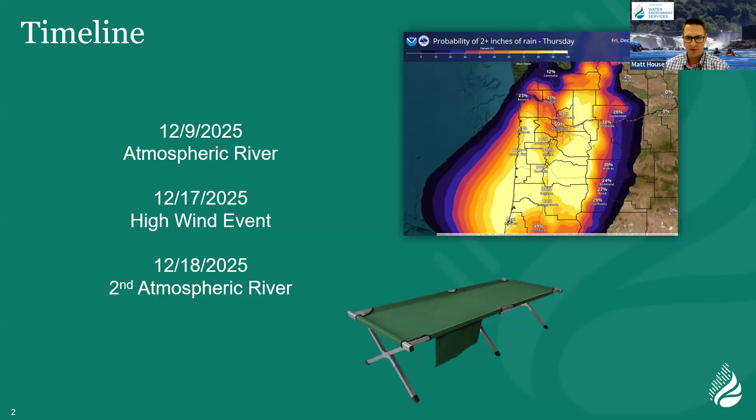Many of our staff ended up working around the clock. We had folks staying at our treatment facilities, basically working all night, ensuring that we were operating and maintaining all of our facilities and responding to issues that came up. Next slide, please.

So this is a graphic that we put together just to show the treatment plant responses, and this is over the course of both events. But for the first part of the story, we're really focused on the event on the 9th. These are peak hourly averages, and you might see some peak instantaneous flows that we observed in slides that are coming later.

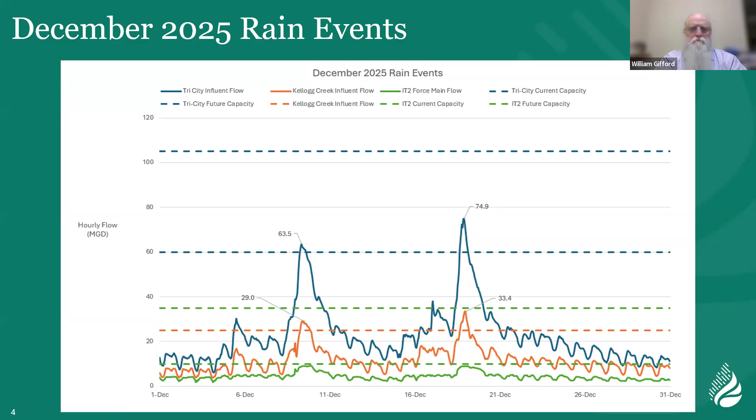Thank you. Next slide, please. So with over 2.5 inches of rain at Tri-City, and we saw over 3 inches in the basin, out in the basin, this first event we did not have the new 90-inch outfall online yet.

Through construction, there's some changes with baffle elevations. Basically, our existing outfall is a little bit higher to accommodate the final design, and we navigated some backed up flows into the plant. You can see here at the peak of the event on the left is what our secondary clarifiers would typically look like, and on the right is what they look like at the peak of the storm. You can't see the weirs; they're completely submerged. Many of you have probably been on tours here before. The left is what we want to see. Right is not what we want to see.

Moral of the story is that we did temporarily exceed a couple of our daily permit limits at Tri-City, but our process recovered very quickly as soon as the flow subsided.

Are there penalties assigned to those if we go over the limits? To be determined, and sometimes we get some grace during these really high flow events. I would say we typically get grace during these high flow events because the 1-in-5-year storm event is kind of not just the engineering, but the regulatory threshold for whether folks enforce or not. That's why it's called an emergency, right? Exactly. And I should have said at the top too, this is totally meant to be a conversation, just sharing what our experience was, and I think it's a pretty good story.

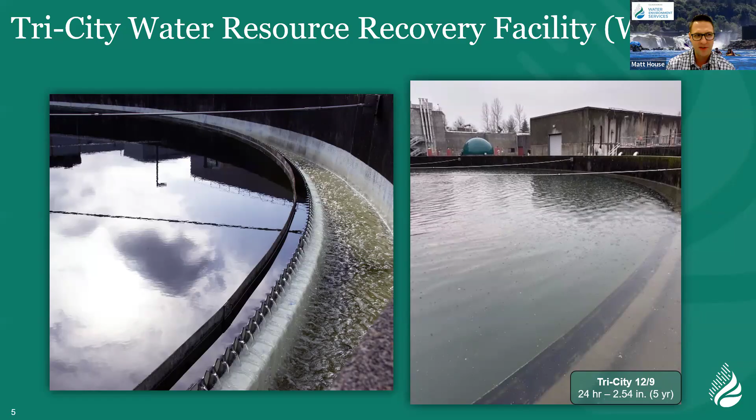So what you can see here is our aeration basin, chlorine contact basin, a picture of our influent pump station, and SCADA at the Kellogg Water Resource Recovery Facility. During this event, we really optimized all of our tankage, so there are some higher than normal water elevations in that aeration basin. For the SCADA photo on the right, red indicates pumps running.

As I mentioned a minute ago, peak hourly average flows were right about 29 million gallons during this event, and our cap there is 25 million gallons. The intertie diversion pump station, which can pull flows away from Kellogg and ship them over to Tri-City, was completely maxed out at 10 million gallons during this time period.

The great news is our intertie project, currently under construction - maybe some of you have navigated around that while we're building it - is going to reduce the peak flow at Kellogg to within capacity during these types of events. Our ability to divert is going to go from 10 million gallons a day up to 35 million gallons a day. That project is going to be completed this year.

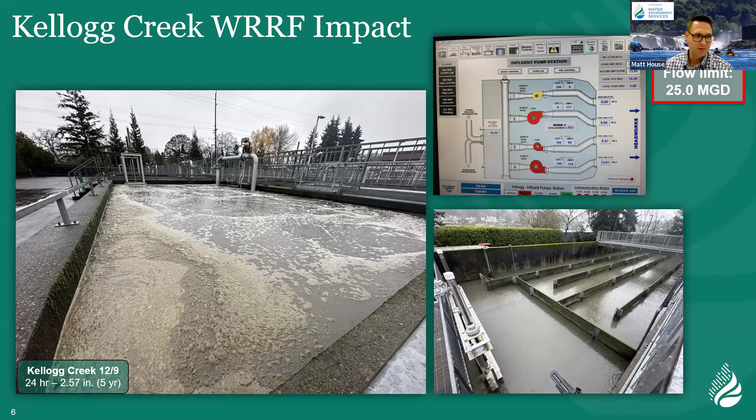So with that first event, we manage over 360 miles of pipes and over 8,000 manholes, and we did experience one sanitary sewer overflow during that event throughout our entire collection system.

This is from the seawall that serves Oregon City, and we've got a solution for this as well. We have an upcoming Willamette Pump Station force main project that will alleviate a hydraulic bottleneck we see during really high flow events coming across the arch bridge. That connection from West Linn will move further downstream across the I-205 bridge. That project is under design right now. We obviously don't want to see any overflows in our collection system, but in this case, given the relative impact to water quality with the very high river flows, and the fact that this site was inaccessible to the public, while not what we want to see, I think we've got a good plan moving forward.

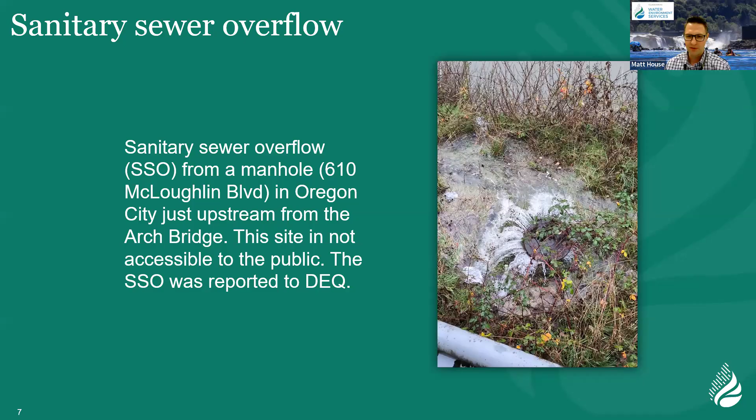This one will come up again with the second event. Moving up to—oh sorry, Mary McGriff, did you have a question or comment?

Maybe not. All right, moving up to the mountain service area. Fortunately, through this whole event, we didn't have any pump station sanitary sewer overflows. We manage 23 of those throughout our service area.

But with the heavy rains—I mentioned almost 4 inches in 24 hours—to avoid an overflow at our Timberline Rim pump station, right next to the Sandy River, we had teams go into 24/7 operations with tanker hauling, pumping directly from the pump station wet well where the wastewater is collected into tanker trucks. We were trucking them up Highway 26 to the treatment facility, unloading them, and making loops for 3 days to prevent an overflow there.

You'll hear a lot more about this station a little later with the second atmospheric river.

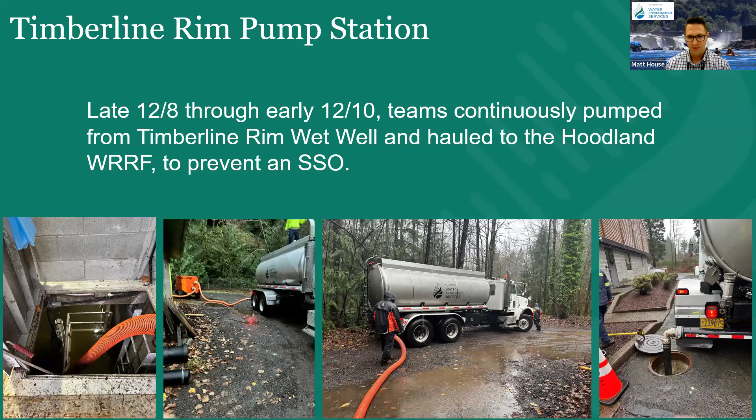So just to keep things interesting, the following week after we got through all that and got our crews home and rested...

I don't know if the wind woke any of you up from the west on that Tuesday night. I know I don't sleep well when we get a lot of events because our team starts getting alarms and they're waking up from bed and coming in to help us out with whatever the issue of the current situation is.

So I stole a little bit of info here from Mark Nelsen, my favorite meteorologist. I mentioned I was a bit of a weather nerd. He noted that this was one of the top 3 west wind events that he had seen in his 30-year career. There's 170,000 PGE customers without power.

We lost power to all of our 6 mountain pump stations around the Brightwood Welches area. The treatment plant lost power too. So that puts us into 24/7 operations, managing our on-site generators and ensuring that all those facilities are operating well and effectively. We had a couple trees go down over our chlorine contact basin at our treatment facility up there.

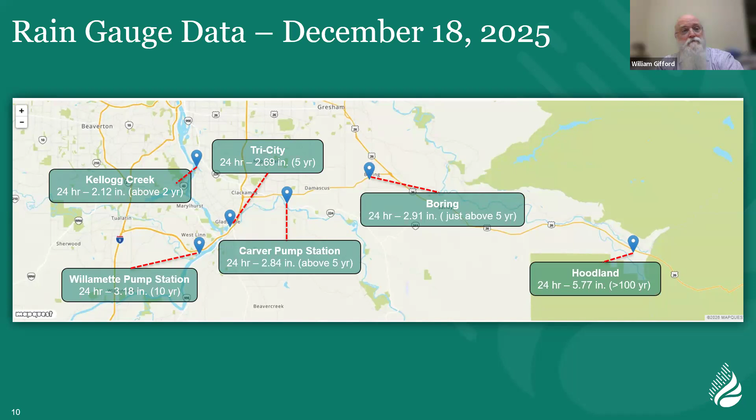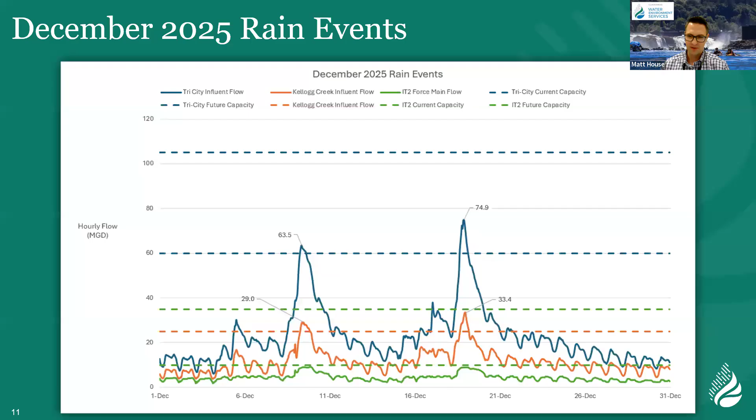But there was one really significant difference this time for Tri-City. Jeff Stollard went to bat for us after the first one. They just stripped off forms of the tie-in box for the outfall project. And earlier in the week, we were able to bring online the new 90-inch outfall for Tri-City, which made all the world of difference for us here. There's still some things to finish with the project, but we were able to get it online.

Just a reminder, the red is running for the influent pump station pumps. And I know it's really small, but most of those are running at 99 to 98%. Again, we're able to move more through the plant because these are designed with one pump out of service. In this case, we had all 5 pretty much running wide open.

Blake and I kept running, I guess since Greg described the acronym, I can use it now, our SCADA. And we both saw and got a screenshot at one point of 79.25 million gallons a day coming through the facility here. It was ripping. We'll leave it at that.

But with the outfall, we go from what was about 61.5 MGD capacity to being able to run our flows out that 90-inch, which can go up to 106. So we didn't have those surcharging issues through the Tri-City facility. And I'm really proud to report we didn't have any permit limit issues at Tri-City with that second event, which is really remarkable, an absolute testament to our team here.

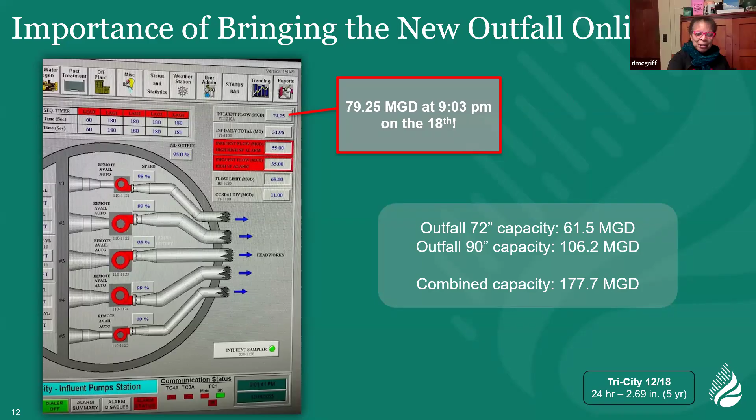Two slides away. All right, next slide please.

Again, our intertie was maxed out at 10 million gallons a day, and we did exceed a couple daily permit values for Kellogg Creek. Based on that event, we got literally the most we possibly could out of that facility. We had folks there all night, and they did a commendable job. But things recovered really quickly, we were back in compliance that Friday. Just thought that was worth mentioning too, since we covered it on the first event.

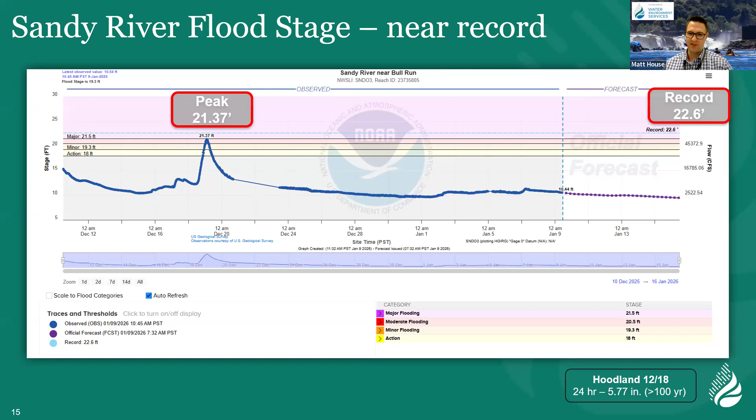And I bring that up mainly for the next slide. Chris, you want to go ahead and cue that up? This is from our team that was running the tankers from the Timberline Rim pump station. We've got an access road that's very near the river there, and they shot some video before we had to make some tough decisions.

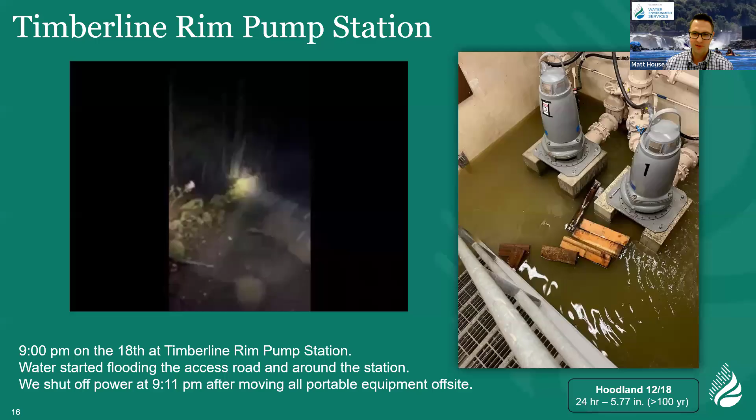Obviously, we contacted DEQ and reported all that. It's classified as a sanitary sewer overflow. Go ahead and cue up that video too, please.

This is in the morning, right after the floodwaters were receding. Standing there, you can hear giant boulders rolling down the river in front. Really eerie, creepy feeling. Saw some trees falling in from the banks downriver. I don't know how familiar you are with the Sandy River, but it's very dynamic. The channel migrates back and forth in this area where we've got a couple of pump stations and a pipe undercrossing.

The good news is at 6 a.m. that next morning, the river level dropped sharply, which you could see back on that hydrograph. We were actually able to pump out the basement and fire it right back up and resume normal operations, which was pretty amazing. I'm glad we made the call when we did to de-energize everything. It was definitely the right move, and really relied on the experience of some of our teams that have worked through events like this before, and just leaned into their experience. But I was so proud and grateful that we were able to get that back up and running the next day, and so we resumed our hauling operations.

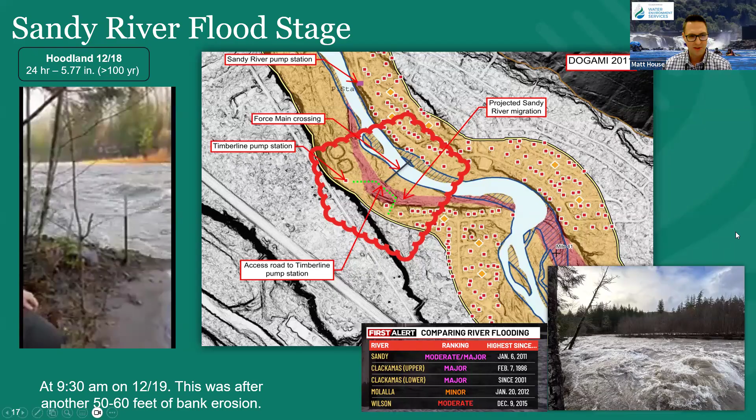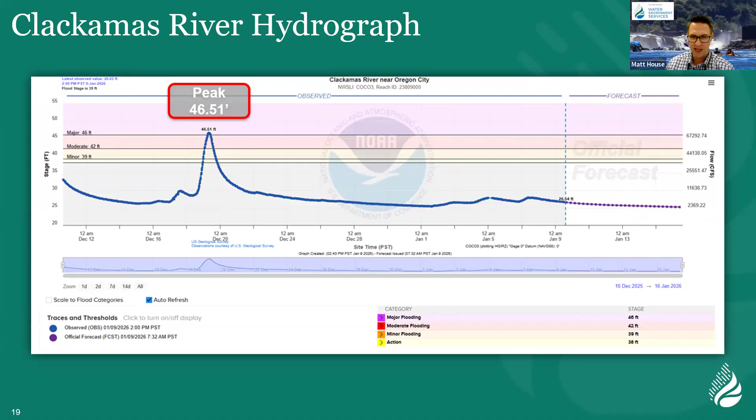So the Clackamas River was classified as a major flood, the biggest in many years. I stole another Mark Nelson graphic that you'll see in a minute, but yeah, major flood down here on the lower Clackamas.

So many of you have been out to the Carli Creek project. Worth mentioning that part of it was turned into floodplain during this event. It was the largest flooding event, per Mark Nelson, since 2001. Best news is that we just had some minor road access damage, but overall the site fared really well. I thought you might be interested in seeing what it looked like at the peak of the flood. Some of our staff got these photos.

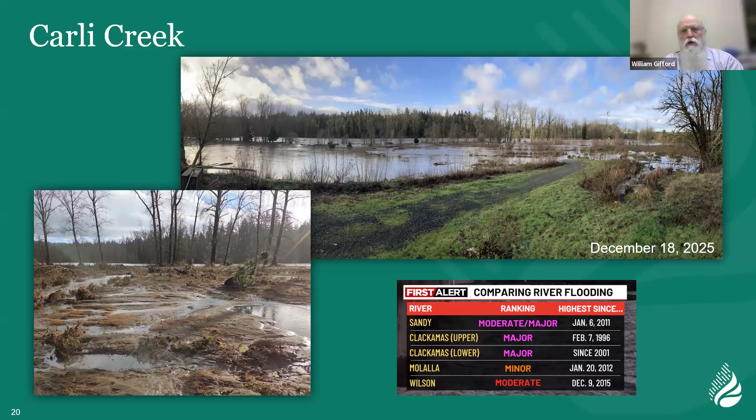So just to recap really quick, we have the intertie pump station upgrades and that 30-inch force main in construction right now. That'll be done before the end of the year. That's going to help us maintain our capacity at Kellogg and give us more operational flexibility, able to bring more flows over to Tri-City. We've got the Three Creeks floodplain enhancement project that's in the works. I know some of you were at the ribbon cutting for that.

As we mentioned, the Tri-City influent pump station is in design right now, slated to be completed in 2028. The Tri-City wet weather expansion, we're hiring an engineer to work on that right now. Classifying that as in design, that'll be online in 2031, and that will upgrade our capacity at Tri-City to 105 million gallons a day.

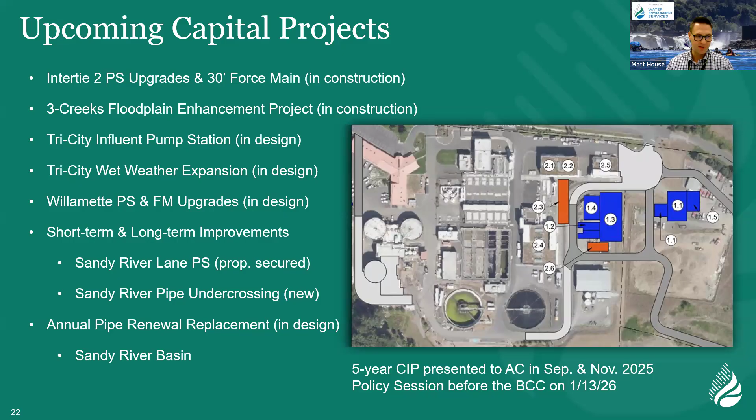So, take a breath. I'll just say, I'm so proud to lead the teams that operate and maintain all of our facilities and our collection system. Mayor Melch was spot on that there's a lot of folks on our team that enjoy the challenge of some of these events and absolutely rise to the occasion.

But one of the proudest moments of my career, we got literally the most capacity out of all the facilities, and everything worked as expected. We prepared well, from all of our equipment, our plants, to our fleet, and couldn't have been prouder about how things went. I want to thank our capital team for all the great planning and execution of projects, getting that outfall online so we were resilient and could withstand that second event.

Our water quality lab worked extra with some of the additional sampling we had to do with a couple of compliance issues. Our customer service team for fielding service requests, and our teams for quickly responding to those. We actually didn't get very many calls about issues for flooding or anything, which was pretty remarkable. Finance, Aaron's team helped with some damage reporting, where we can potentially get some funding in the future.